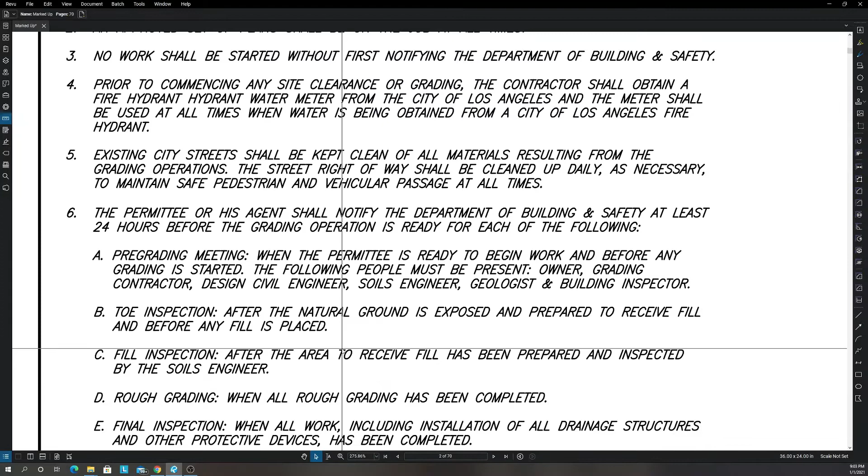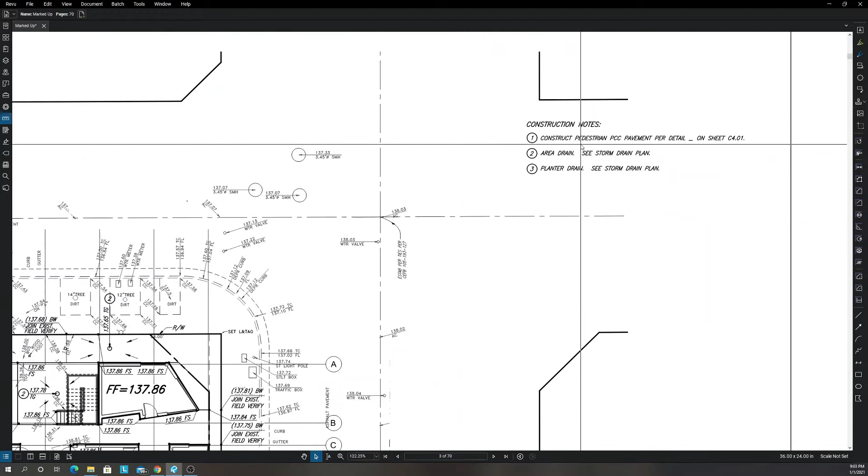Alright, these are just general notes. Okay. So let's continue. Okay, so this will be a grading plan. You will find different keynotes. Like right here, number 1. For number 1, you will construct the pedestrian pavement. So let's look for a number 1. This is a number 1 right here. So this is the pavement.

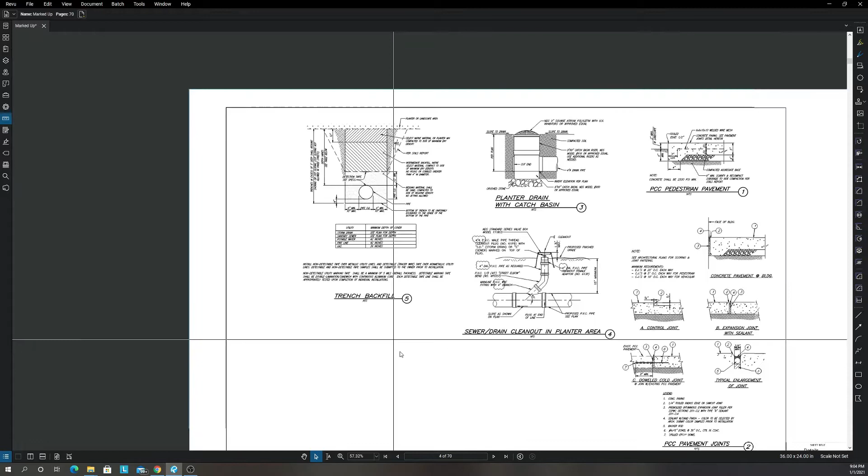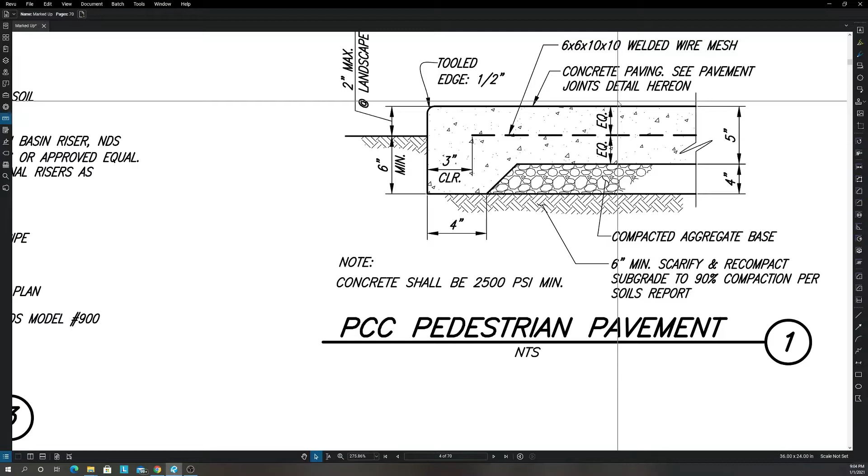So these are details of how the pavement will look. It has a thickened edge with a tooled edge. You need a 1/2 inch. Then they're requiring 6x6 by 10x10 welded wire mesh. So instead of rebar, we're going to use welded wire mesh. It's going to be 5 inches. It's going to have 4 inches of compacted base and 6-inch minimum subgrade. So you have to scarify it and recompact it up to 90%.

Okay. Then right here you will find your control joints. These prevent cracking from extending in concrete, so the crack will stop here instead of going all the way. Now this one's asking for an expansion joint.

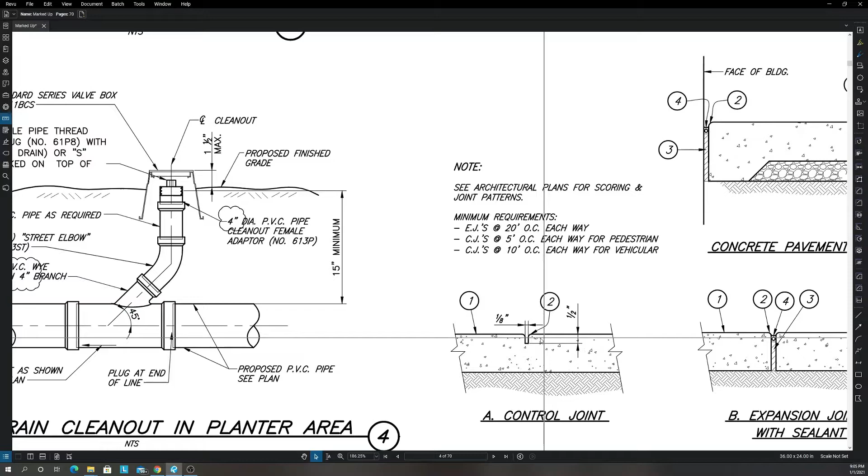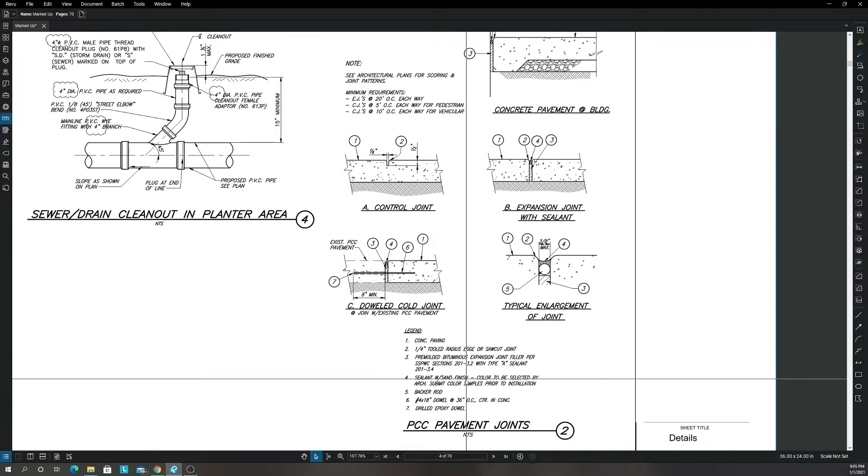So let's see the keynotes. So number 1 is concrete pavement. Number 2 is your tooled radius edge. Number 3 is your pre-molded bituminous expansion joint filler. Number 4 is your sealant. Now right here, if I were to zoom in right here, number 5 is a backer rod.

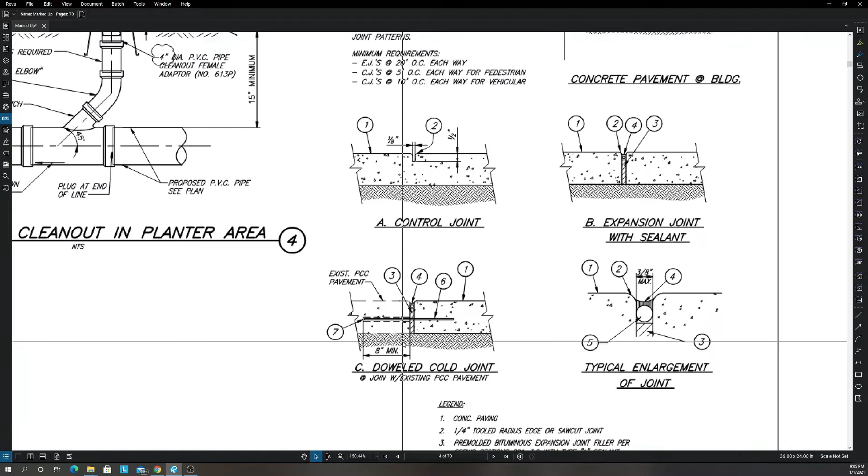Okay. Now this one has a doweled cold joint, which is different. So you will do this when you join an existing concrete. So this is existing concrete. We are going to pour against it. They're asking to have a dowel that is 8 inches minimum into that concrete and then into the new one. Let's continue.

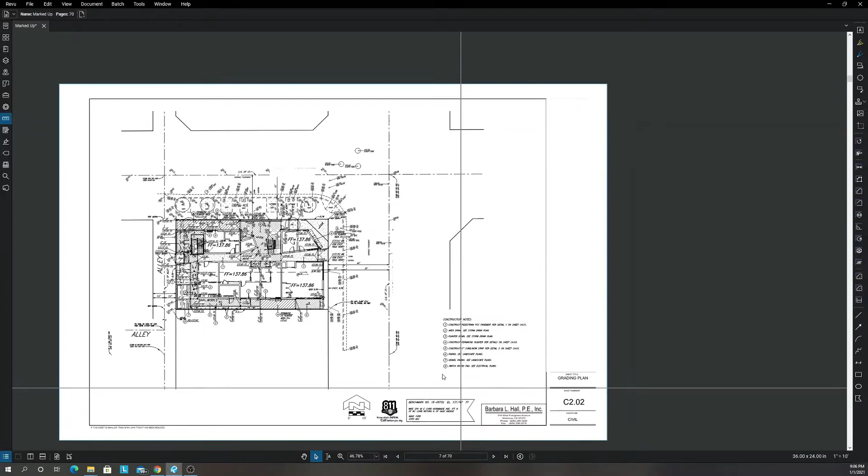Now this is a grading plan. So right here, let me split the screen real quick. So right here you will find for number 1 it is a pedestrian pavement. So let's find the number 1 again right here. Number 1. Now this one seems like it's a different type of concrete.

Let's see number 6. It says paving, see landscape plans. So for this kind of paving, we would have to look at the landscape plans. It might be pavers. Maybe that's why it's telling you to go to the landscape plans. So we might not do it.

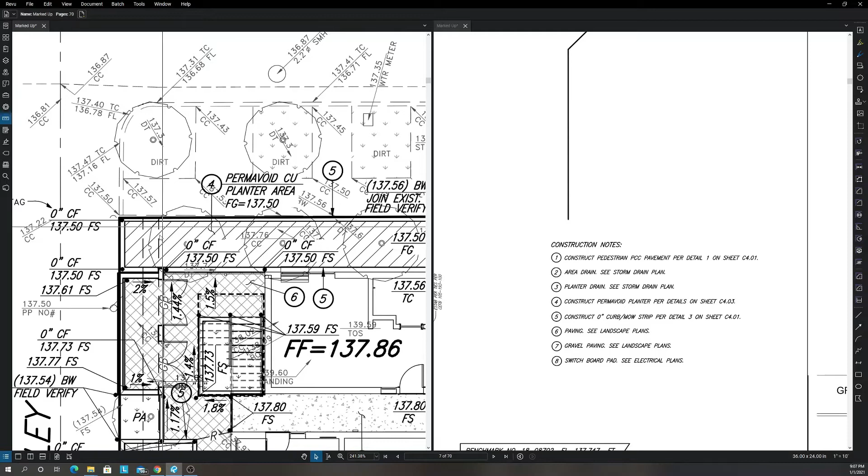Now it's calling out a 0-inch curb mow strip right here. That's for planters. So there's going to be trees right here. Let's see number 4. Yeah, so there's gonna be a planter right here. Number 4. Alright, let's continue. This is the same. Okay, the same details that we saw earlier.

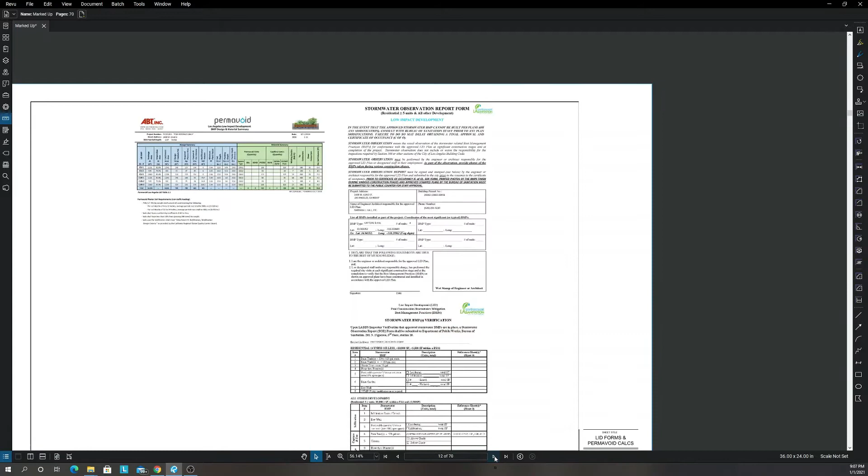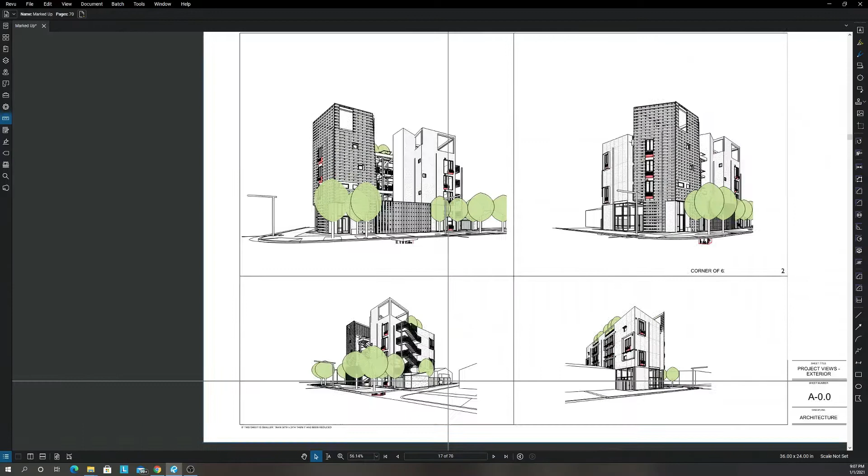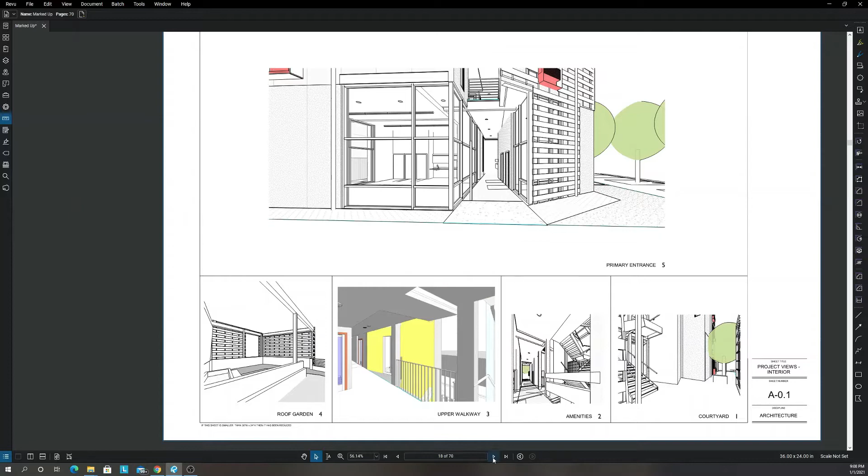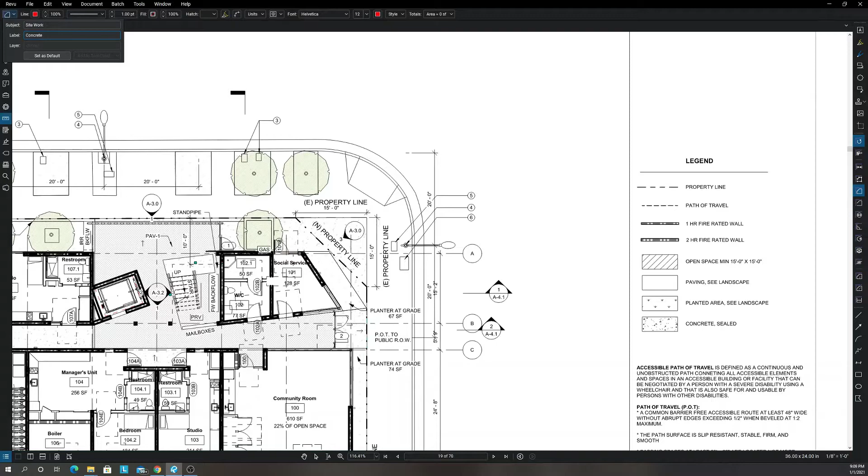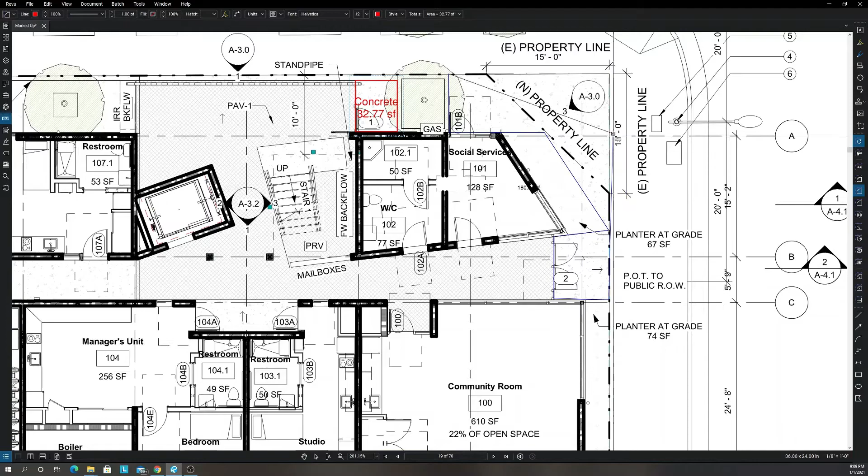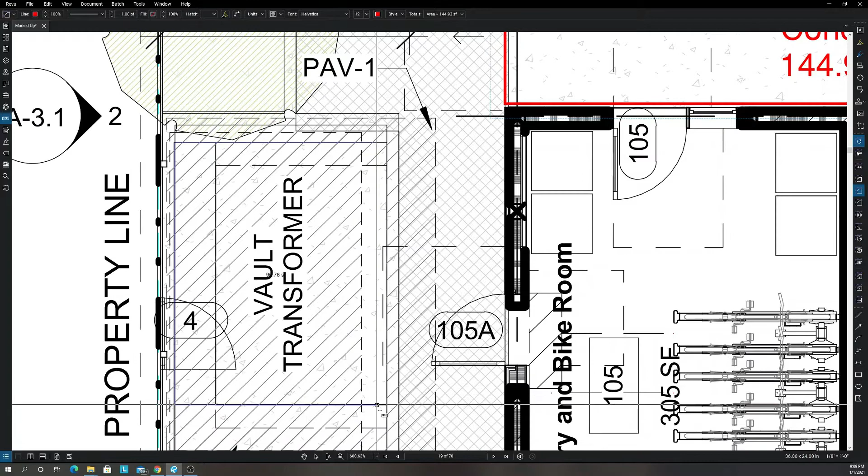Okay. Now I will just click where I see it. So I see it right here. Okay. Now I see it right here too. Let me see where else can I see it. I'll see it right here too. Where else can I see it? I think right here where the, see how far it extends. I'll just say it's up to right here. Up to right there.

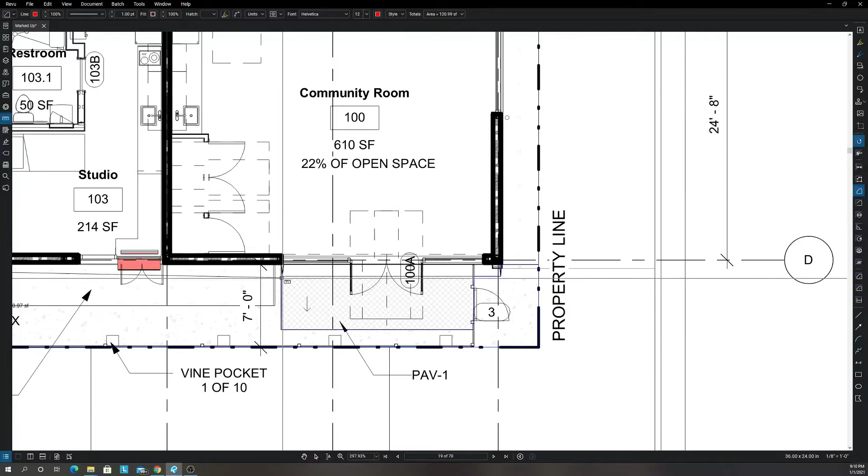And now we have right here, there's some more concrete. Let's go all the way to right here. It seems like it goes up to right here. Okay. Where else does it look like there's some? That's a planter. I think that is. Then there's a little area right here. Okay.

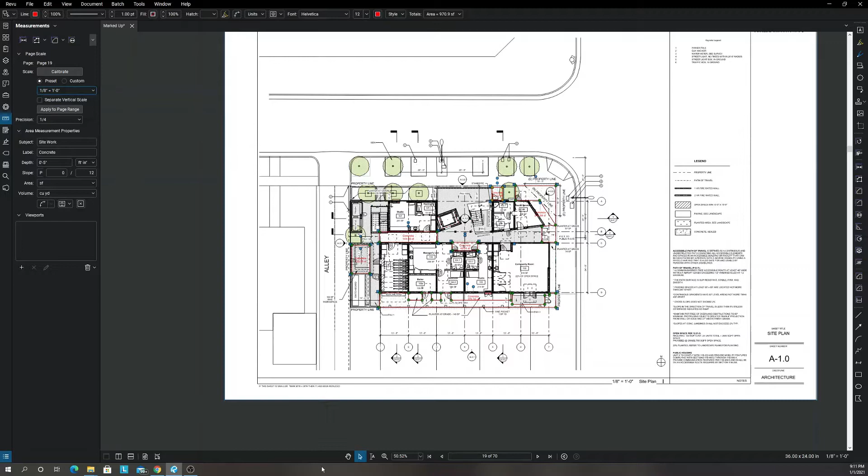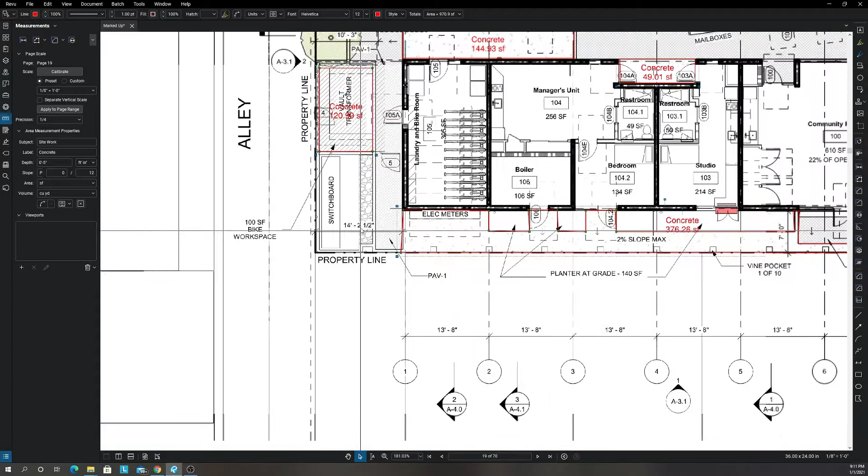Alright. So that's how fast I estimated the site work concrete. And as you guys remember, it was 5 inches. So right here I will add my depth, which is 5 inches. And I want it to be cubic yards. Okay. And then I have to add the scale. So the scale, 1/8 equals a foot. And now let's see what it is right here. Okay, so just the pavement is 15 cubic yards. Okay, perfect. So let's continue. See what else we'll find.

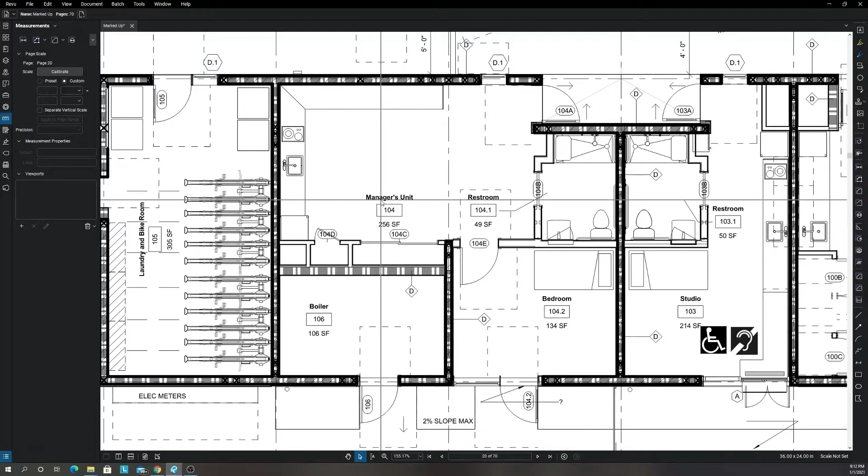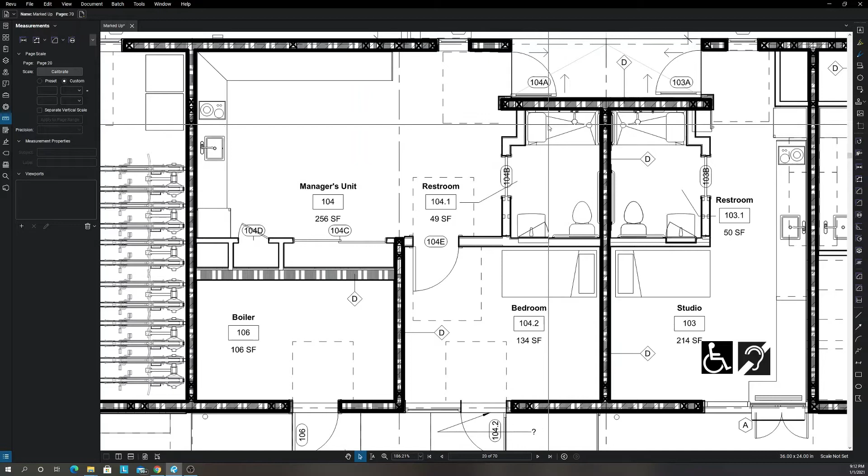So this right here is a floor plan. Let me show you guys a floor plan real quick. So the floor plan, you would find the apartment units. So this one's telling you it's 104. This unit's number 104. It's 256 square feet. And right here is showing you the closets. This seems like it's the kitchen because this looks like it's the kitchen sink. Yeah. Then this right here is the restroom. So like it's a bathtub, water closet, the lavatory. Okay.

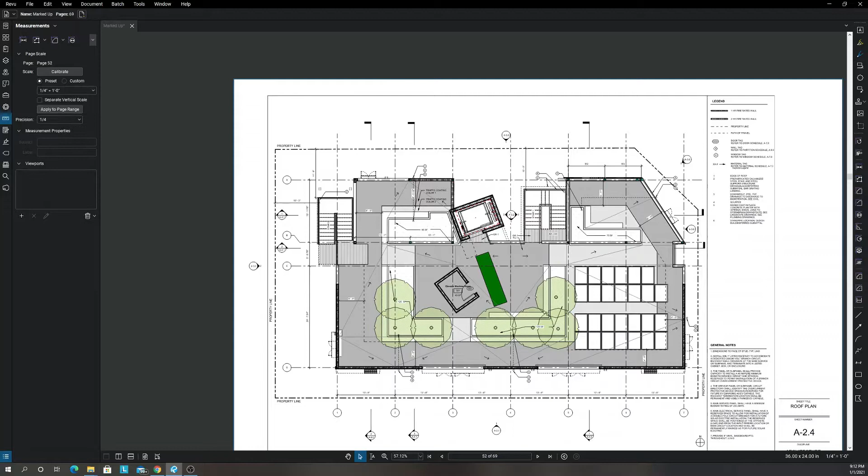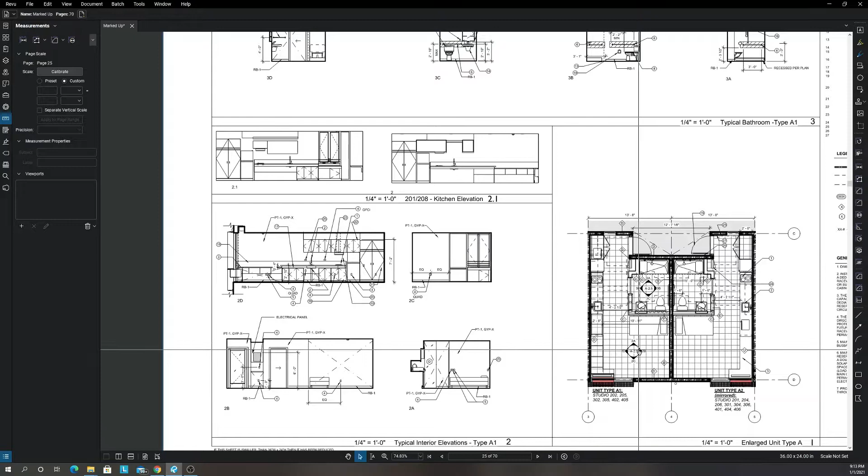So now let me show you guys an interior elevation. So let's say you were to take a picture of this side. This is what it will look like. 2A. So this is if you were to stand here and you were to face that way, this is what it will look like. Okay. And then same here.

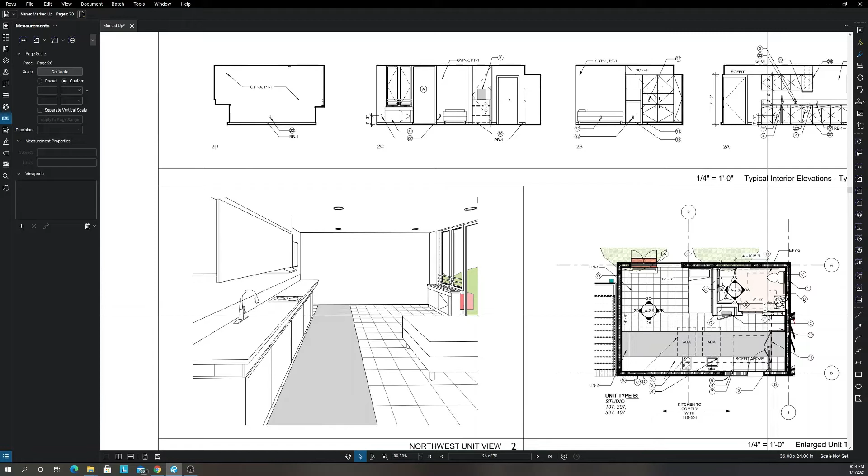This was number 2. It seems like this area is this area, or well, it's actually this area. The bed is right here. Actually, yeah, it's facing that way. So this bed is here, and this sink is right here. So if you were to stand here and you were to face this way, this is what it would look like. Okay. So let's continue.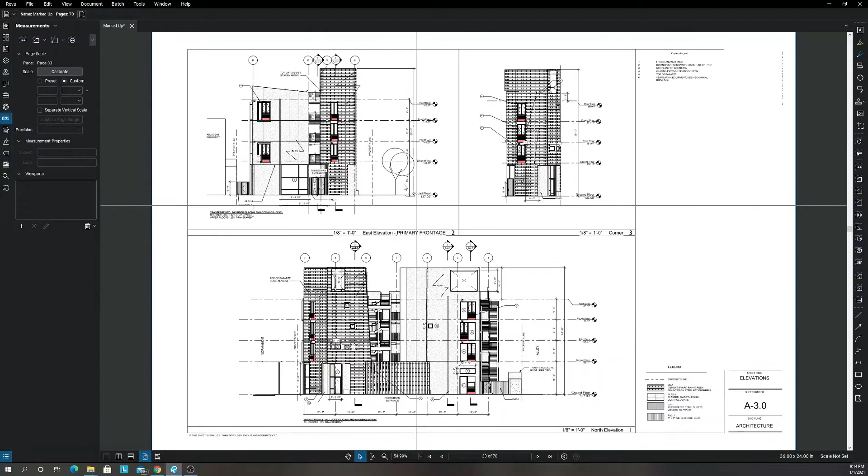And today I will show you guys how to do concrete. Alright, so these are elevations. So this is the north side of the building. So if you were to stand outside and look at the north side of the building and take a picture, this is what the building will look like. And the east and the corner will look that way if you were to stand in those faces. The west, on the west side, we could see some stairs.

These look like there are steel stringers, and the guardrails look simple. When I used to work for a structural steel guy, I think we were charging 130 a linear foot. Please do not use my number to estimate these, but I think that's how much we were charging. I can't remember. It was about 2 or 3 years ago, or maybe longer. By the way these years go by, I can't remember. But this is what this elevation looks like.

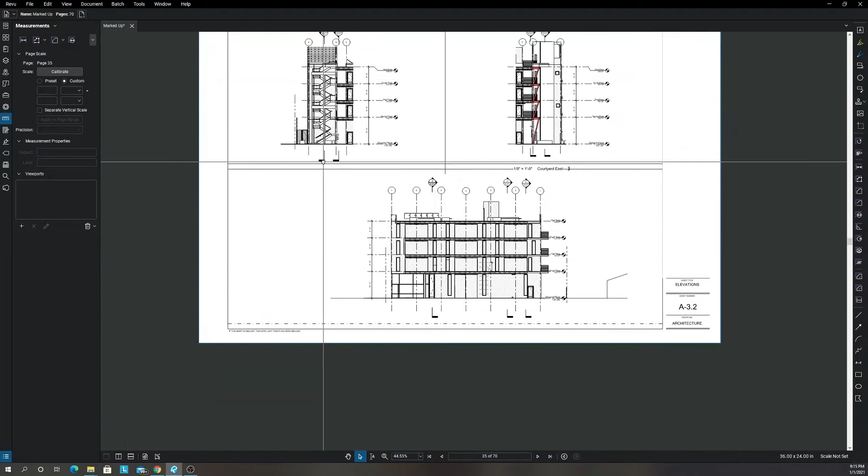Okay. Yeah. Here you can see another elevation of the stairs. Look how nice they look. They look like they will be made out of steel.

Okay, so now these are the building sections. So what is a section? A section is like when you make a sandwich and you put the bread, the ham, the cheese, the lettuce, the tomato, and any other ingredient you would like to add, and then you slice it in half, and then you see the different layers. So that is what you're looking at here.

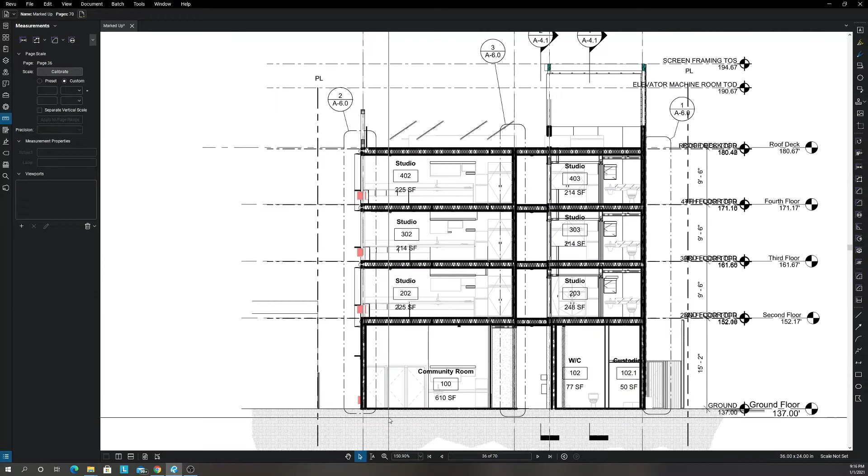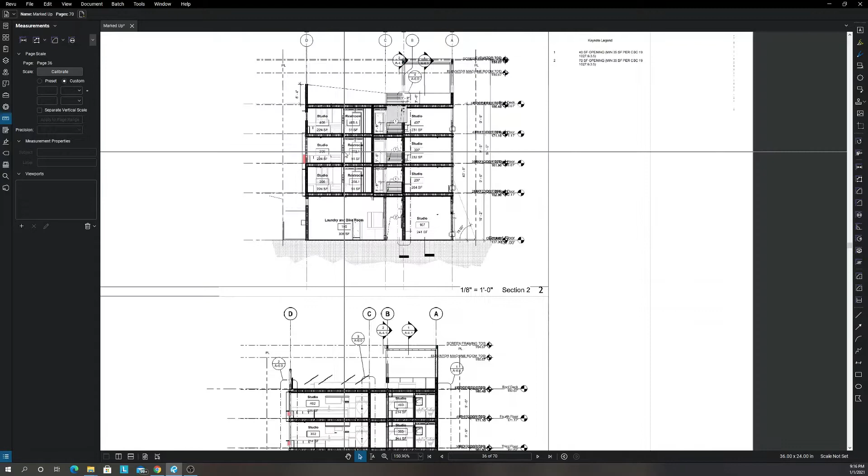So this will show you what the subgrade will look like. Then the beams, the columns, the rooms. So right here is showing you how this room will have the water closet. Yeah, so that's what a section is. So that's different from an elevation. An elevation shows you the face, and a section shows you the different items, the different layers. There's another section. So right here you can see the stairs.

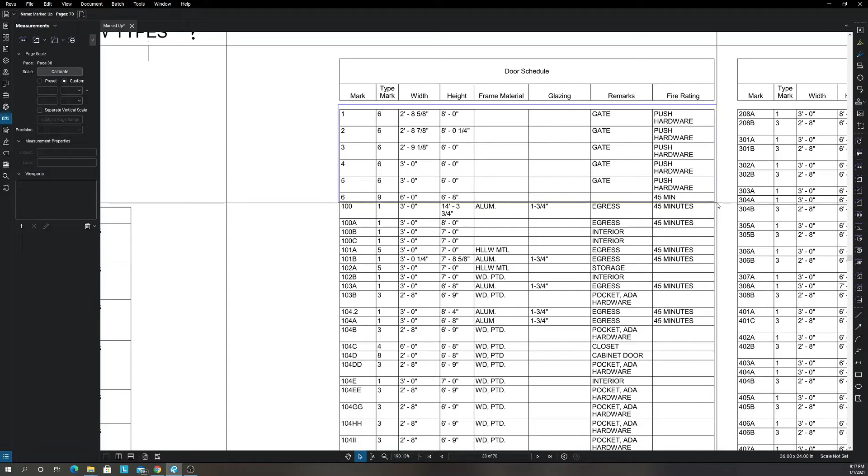Here you would find a door schedule. So if you wanted to know what kind of door you need in any area, you will check here. So doors number 1 through 6 are exterior doors. They're gates. And then it seems like 100 to 501 are for the inside of the building. 501 is for the storage room.

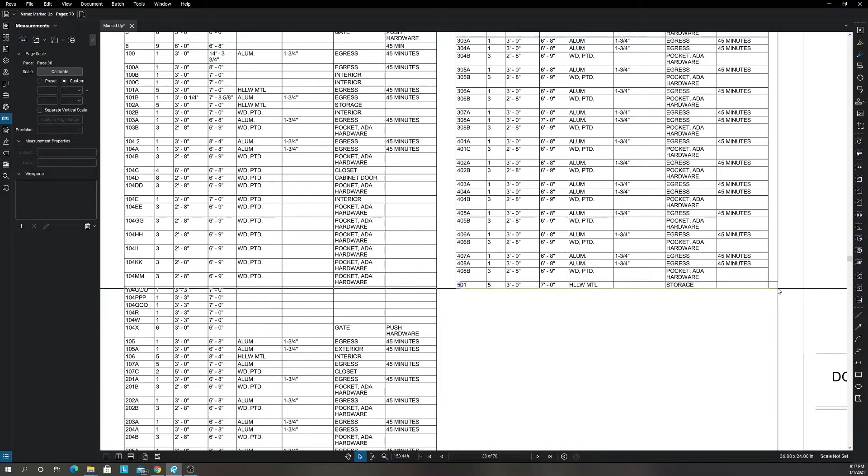Okay. Some of these doors require them to be 45-minute fire rating, so you have to be careful with that. Make sure that they are 45-minute fire rating. See some of these.

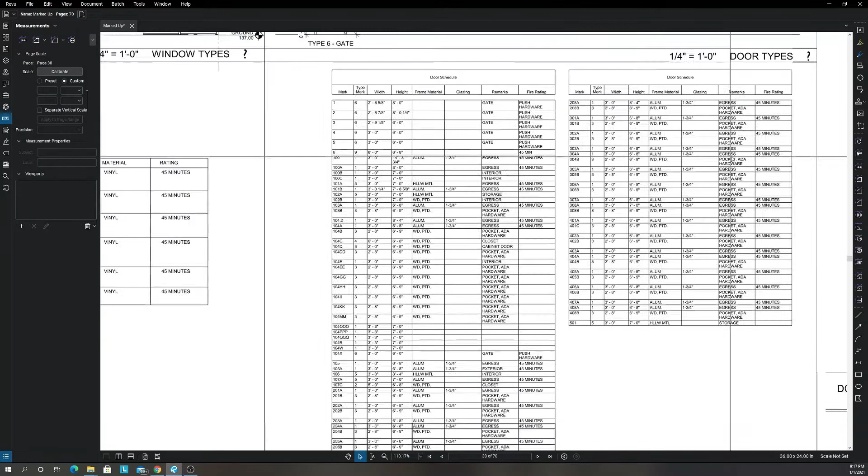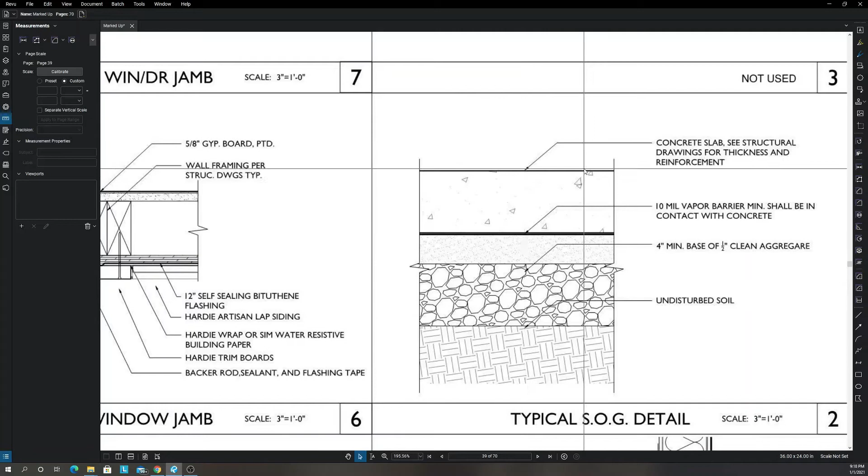Okay, now these are details. Like this one shows you how the slab on grade will look. So we need undisturbed soil. We need a minimum of 4 inches of base of 1/2 inch clean aggregate. Then they're requiring a 10 mil vapor barrier so that water doesn't go up. And then the slab. Alright.

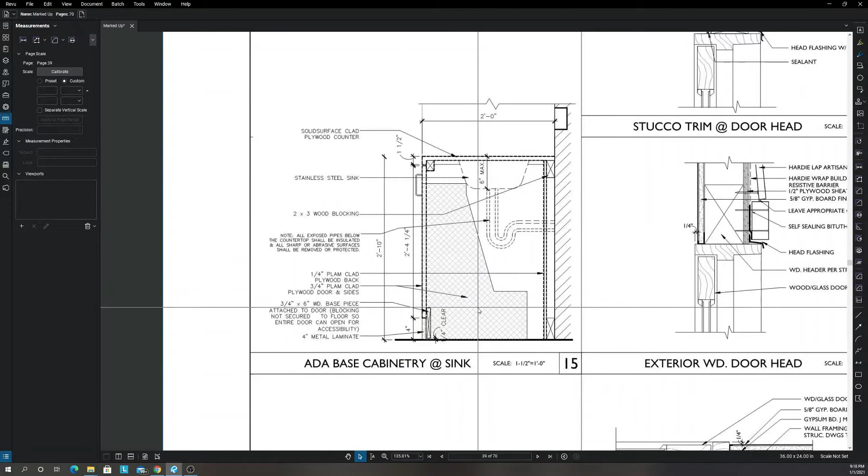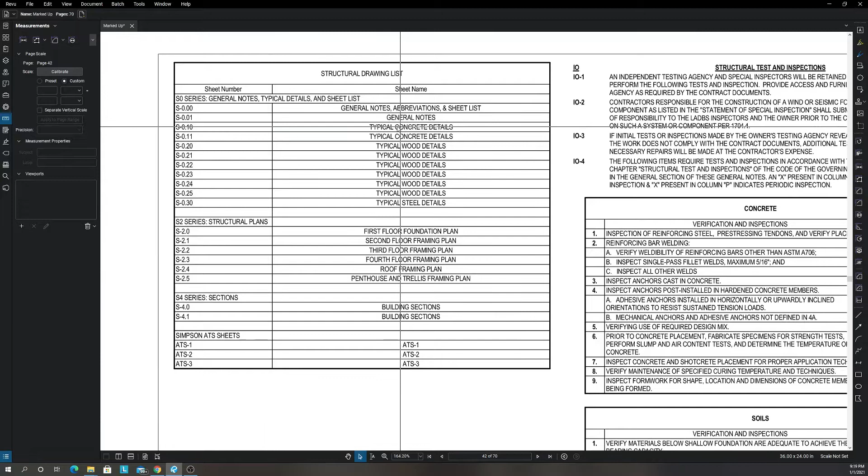Let's continue. Alright, so now these are the structural drawings. Okay, let's see what we will find here. So there's a structural table of contents here. So it's saying we will find some general notes, abbreviations, and the sheet list. Then on the next page, we'll find general structural notes. Then on S0.10, we will find typical concrete details, and so on. Okay. So let's dive in.

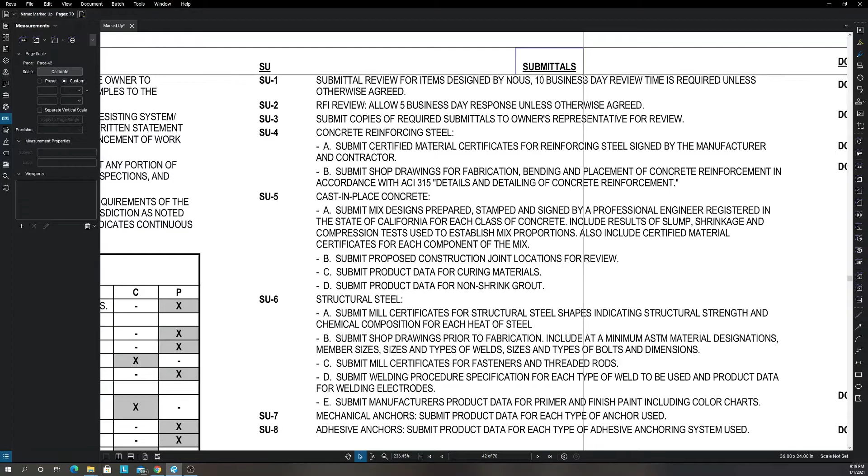Okay, so submittals. Submittals are basically you have to show them the material you're installing so they know you're installing the appropriate material. So make sure you read the plans right and you know the concrete design mix. Let's look for this one. Okay, so right here it's highlighted already. It's telling you that the foundation's design mix has to be 3000 psi at the 28th day. Has to be normal weight, and the max aggregate size is 3/4 inch for the foundations.

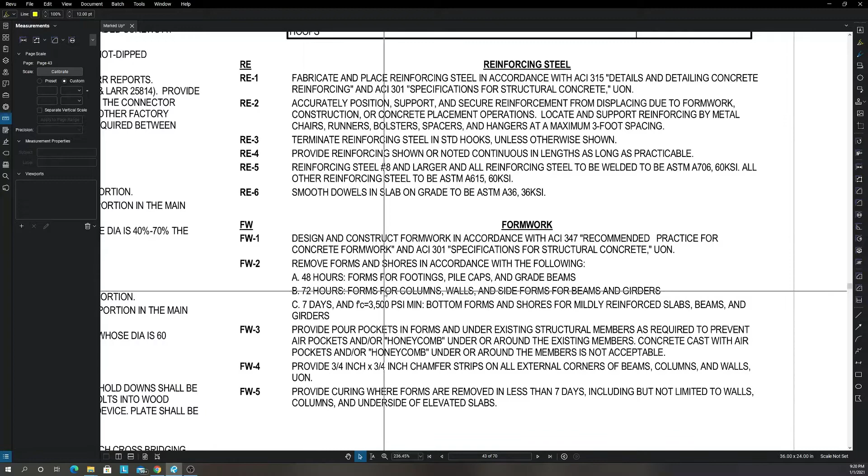Now it seems for the slab it's 3000 psi at the 28th day as well. The water to cement ratio is 0.6 and this one's 0.45. And the max aggregate size is 3/8 of an inch. Okay, perfect. And it shows you your rebar as well. Okay, so that looks perfect. And then it's telling you your formwork. So it's telling you to remove your forms and shores in 48 hours if they're footings, pile caps, or grade beams, and in 72 hours if they're forms for columns, walls, and side forms.

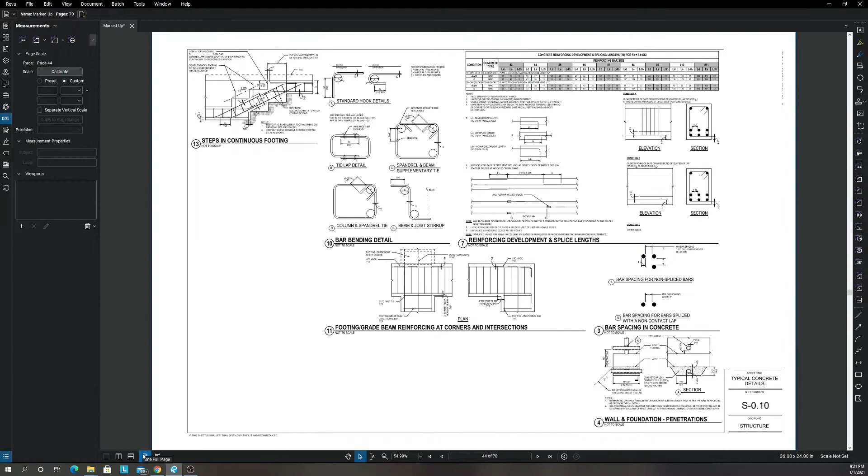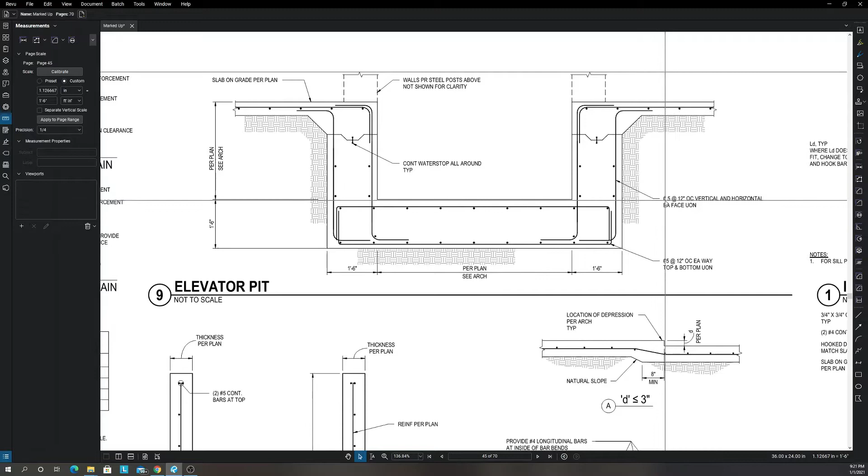This is the detail of an elevator pit. So this is the slab on grade. There's a keyway. It looks like it's going to be a steel column. Then you have a stem wall. And then you have a slab right here. It's telling you the rebar needs to be number 5 at 12 inches on center, vertical and horizontal.

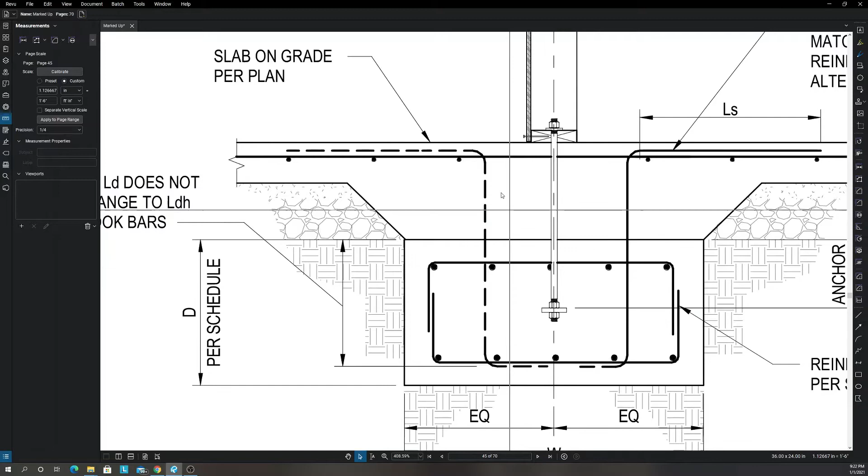Okay. And this is how the columns will be attached to the concrete. So there's going to be a footing pad. And this will be your continuous footing. And you're gonna tie the steel column to the concrete footing pad and footing and slab by using an anchor rod. And this seems like it's plywood, so you're gonna nail plywood onto the plate.

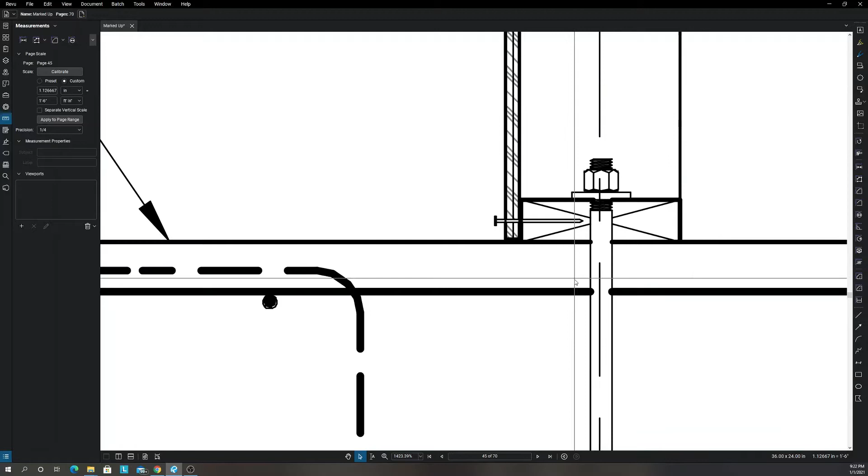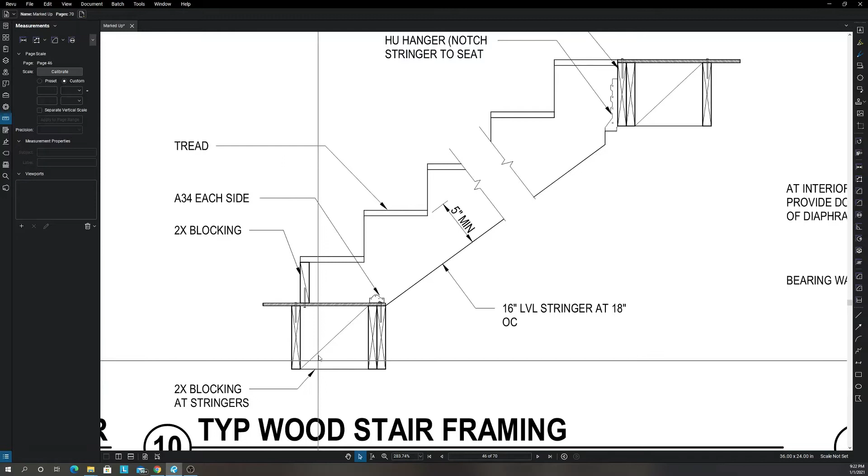And you're gonna put a plate, a washer, and a nut, and then you're gonna screw it, and that's what's going to hold the column down. In case there's an earthquake, if this pulls up, this will be pulling down, so this will stay stuck. That's how we survive earthquakes here. If you wanna know how wood stair framing looks, this is what it looks like. Okay. See how they nail it? Boom, boom.

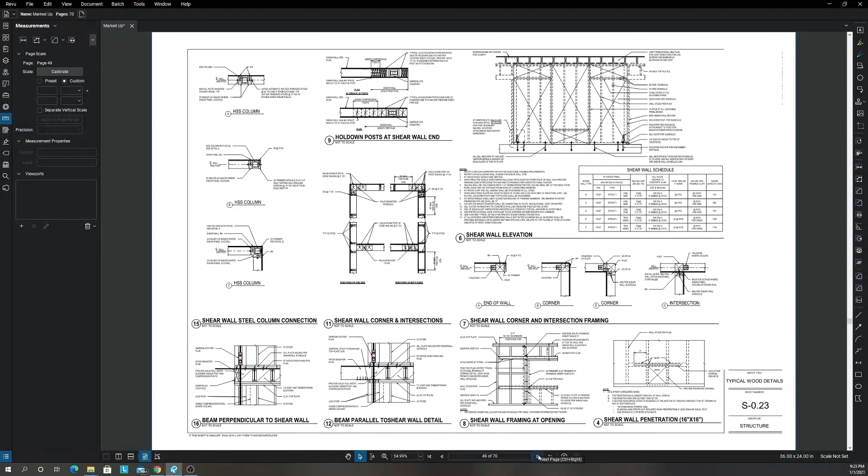This is hardware. It says A34 on each side. This is for your shear walls. Okay. This is your column. Look, it says HSS column. So this is a hollow structural steel column.

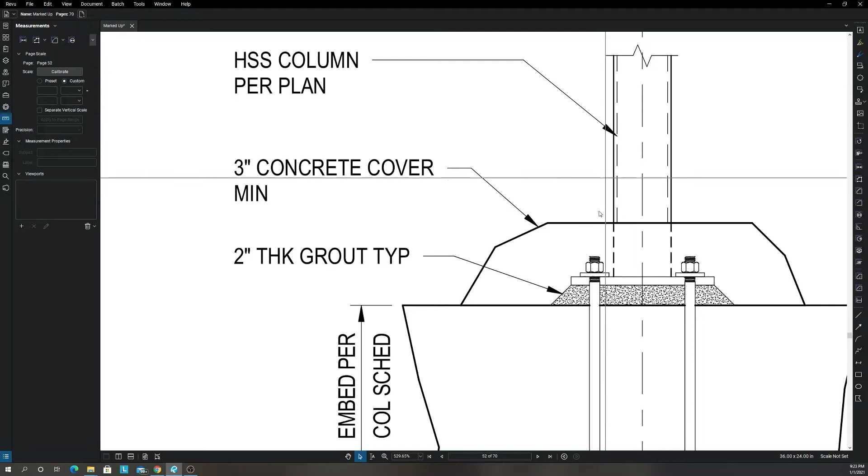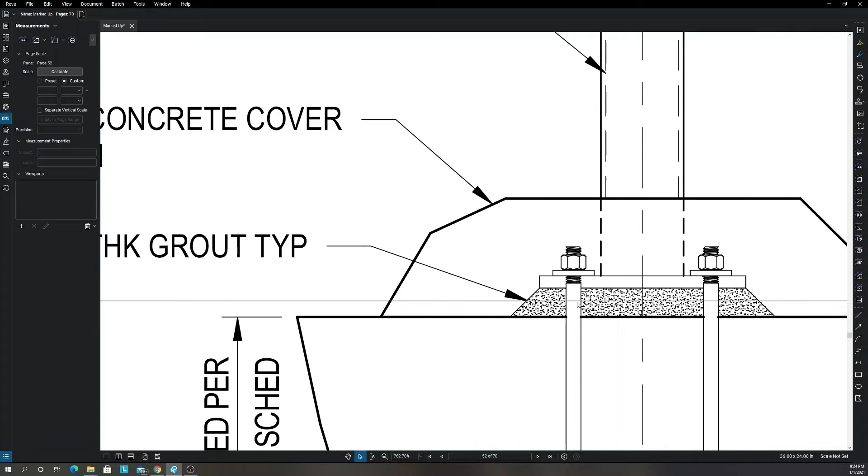Then this will be a plate that they fabricate, and so the structural steel fabricator will show the concrete contractor where he needs these, or the contractor will see with the plans where these will go. The structural steel contractor will fabricate these. He's going to give them to the contractor, and then the concrete contractor will form them with 2x4s. He'll put 2x4s right here. He'll place this right on top, and then once the concrete is dry, he'll hammer them out.

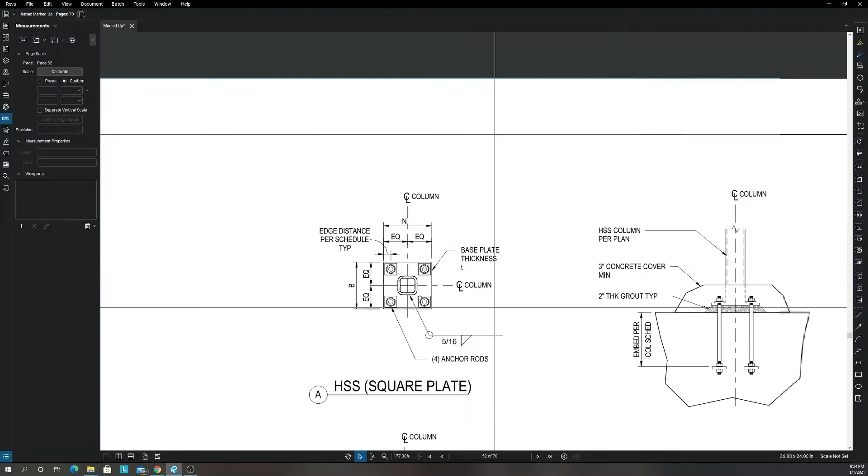And then I don't know if the concrete contractor or the structural steel will install the grout, but that's usually how it goes. And this is this plate right here. This is how it looks. This is the column, and you can see it right here. Right here is telling you the sizes. That's pretty interesting.

So I would use my area tool, and I like the color blue, but let me do cyan. So I'll start clicking. So I will click right here. I will click right here. I will click right here. I'll click right here.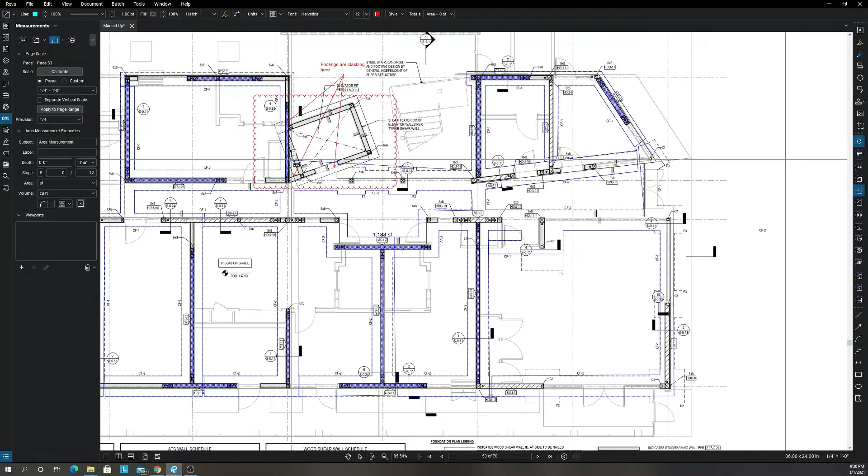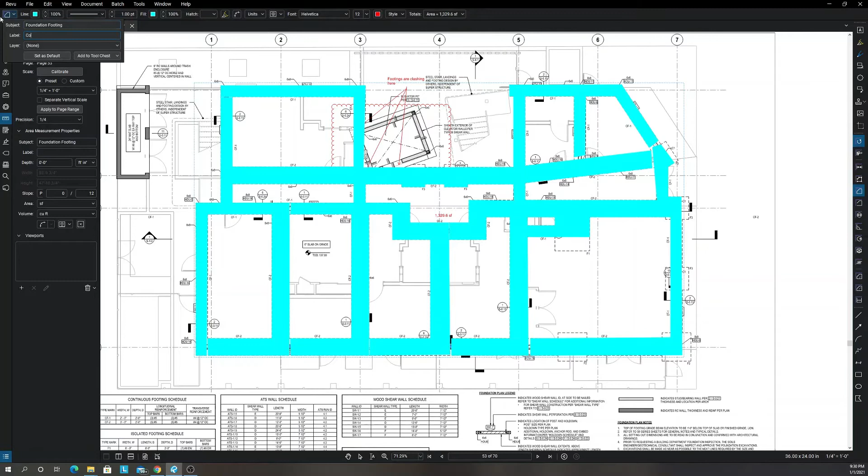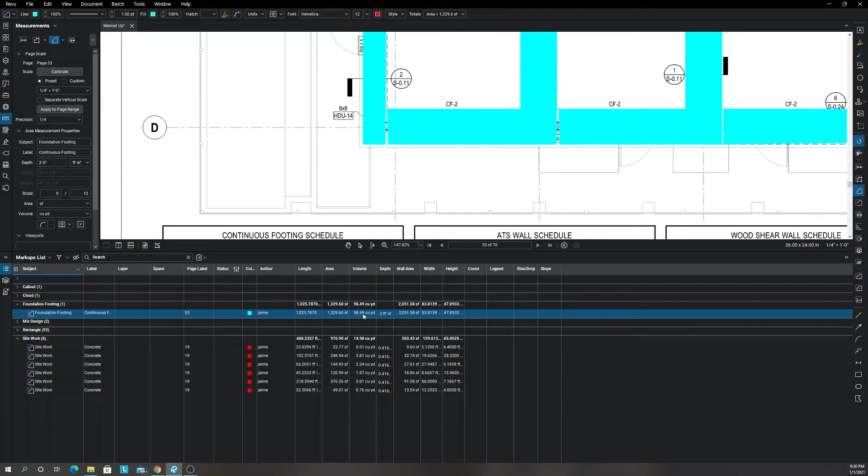So as you guys can see, I got the whole footing right there. So right here for subject, I will put foundation, footing, and then I'll put continuous footing. Okay. And then right here, it's saying it's 2 feet, so I'll put 2 feet, and I want it in cubic yards. So let's see, it is 98.5 cubic yards. Okay, I will just say it's 100 though, since I missed a couple spots. So I will just say it's 100. Okay.

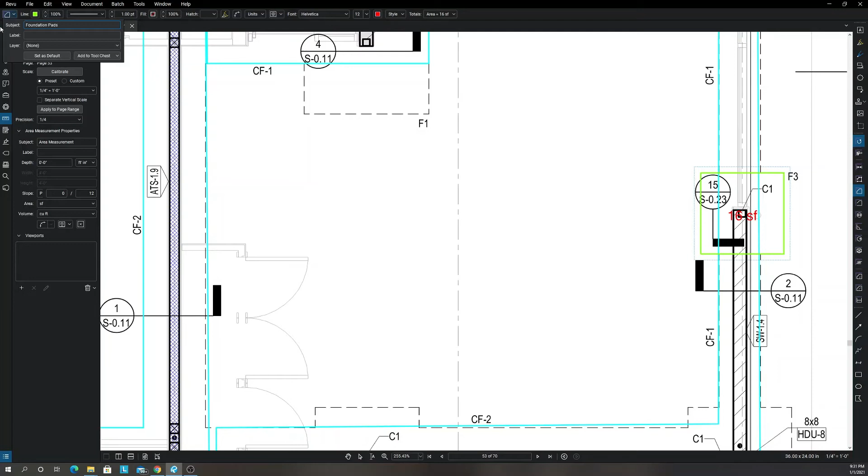So now from there, it's telling me we have some isolated footings. So those are footing pads. So we have F1, F2, F3. So let's look for them. So I will get my area tool right here. Let me do it green. So there is an F3 right here. And then this one, I'll call it foundation pads. And this one is called F3. Okay. Alright, so now wherever I see an F3, I will place this one.

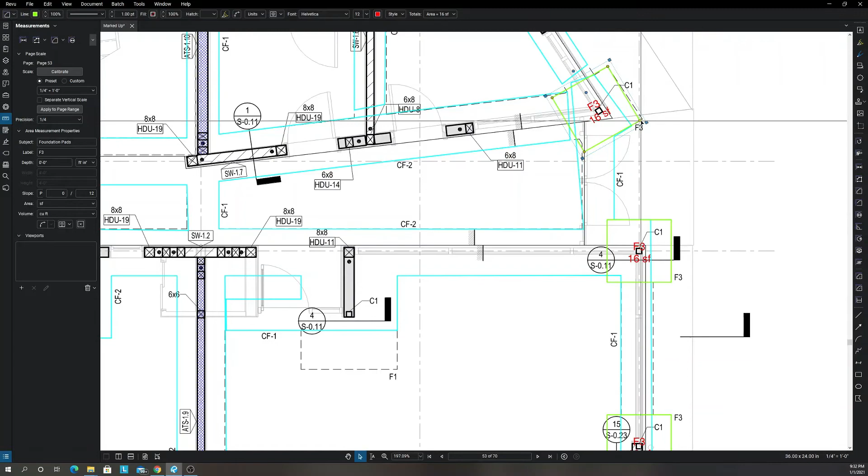So I see one right here. I see another one right here. And I see another one right here. Okay. Alright, now I see another one right here. Let me spin this the right way. Okay, perfect. That's fine. Alright, now let me see. So there's an F2 right here. Let me drag this one right here. Okay. Let me change it to F2. And let me change the color to orange.

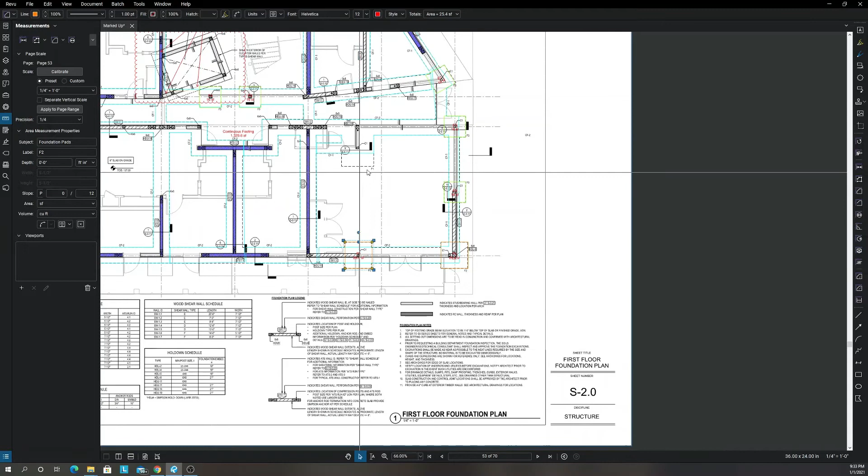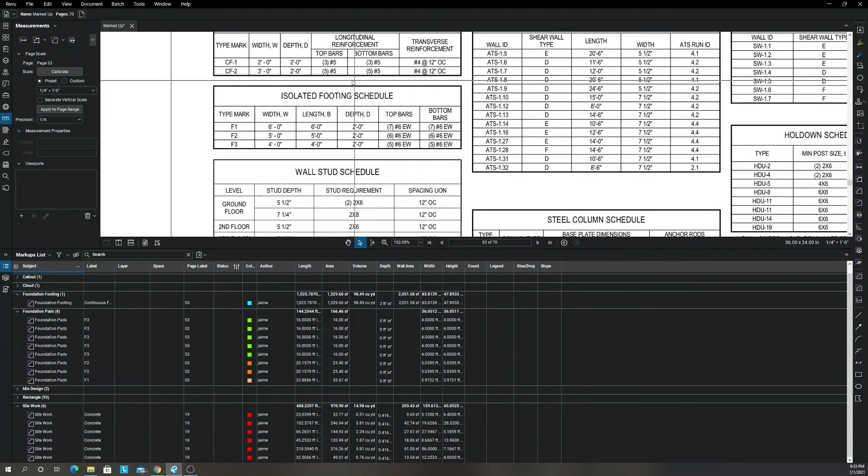Okay, and then I see another one right next to it. Okay, now right here I see an F1. Okay. So it seems like those are all the footing pads. Okay, and let me see. They are all 2 feet deep. Okay, now there's a 6-inch slab. Let's do it real quick. So I am guessing that it will be, let's see.

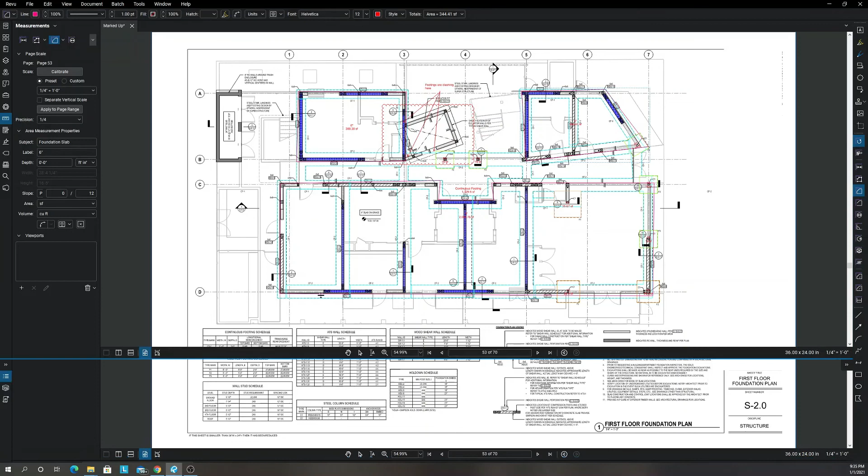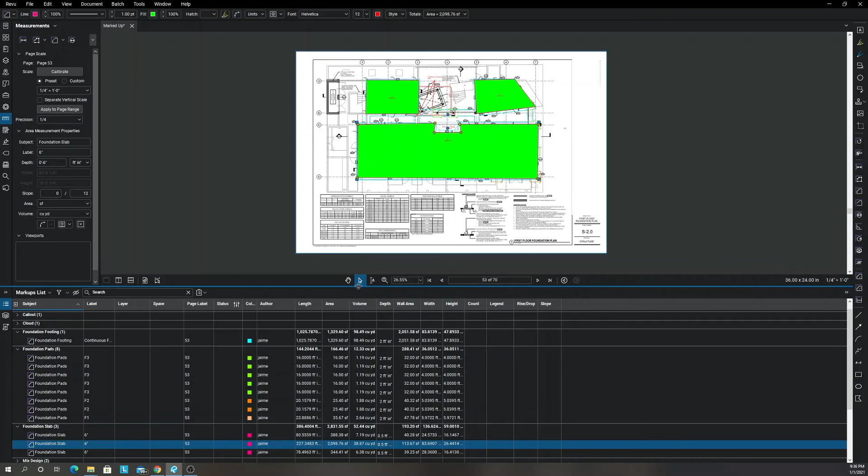So this is the slab right here. It is 6 inches. So the slab is 53 cubic yards. So today we estimated 100 plus 13.33, so let's say 113, plus 53. So we did 166 cubic yards of work today. Okay. Perfect. I hope you guys learned.

I hope my next video will be slower. I'm sorry I was nervous today.